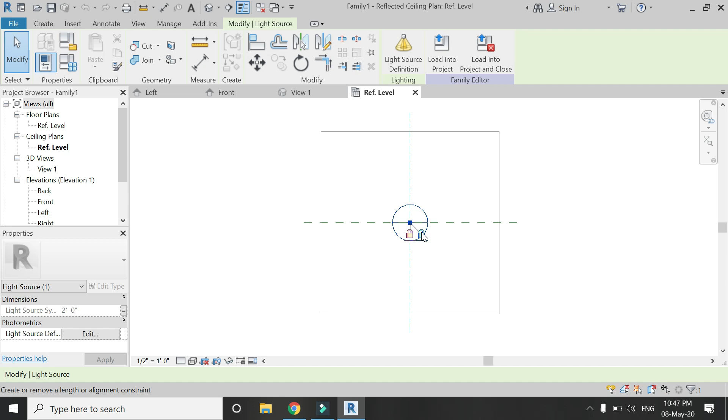Open a new family template file of this lighting fixture ceiling based. Now this family template file has this light source and a built-in ceiling. So whatever you design in this family file, it can only be placed on a ceiling.

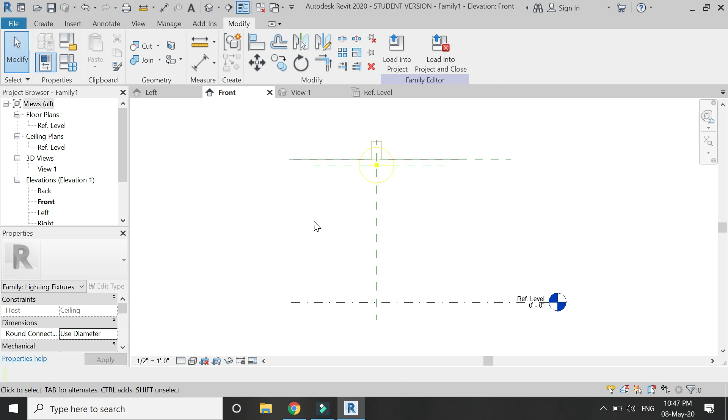So first of all, I've selected this void extrusion and I have created a circle of radius 3.5 inches because that would be the size of the light, and then I'm going to give it the extrusion end value 1.5 inches being the thickness of the light. Remember, use the void extrusion command for this.

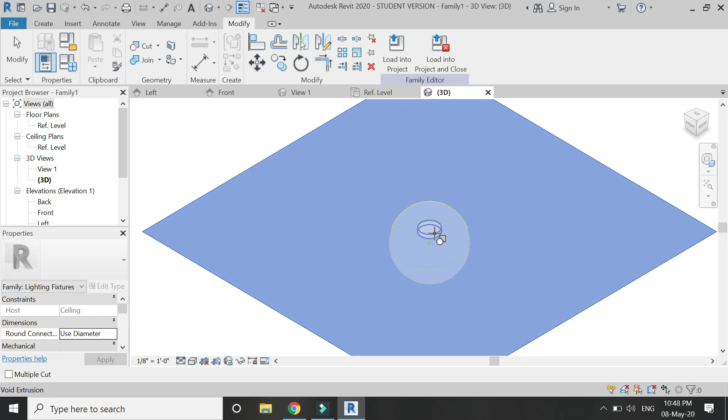Then go to the 3D and then select the cut command, then select this ceiling and then select this void extrusion. The purpose of this step is to create a void within a ceiling when you load this family file into the project. So this void extrusion will help in creating a void within that ceiling and it will not be overlapped.

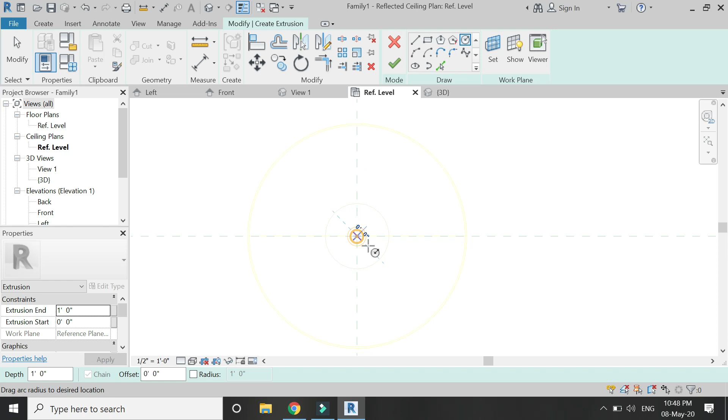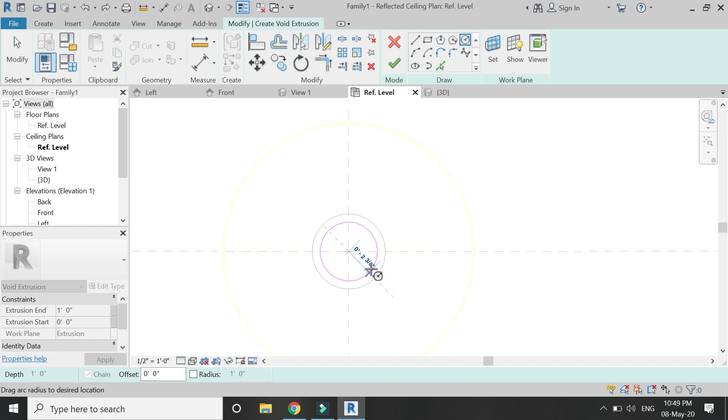Now select extrusion and again draw a circle of same radius, give the same extrusion end value. Again select a void extrusion, set the reference plane to this surface and draw a circle of 2.75 inches, this being basically the design of the light, and then give it this void extrusion, this thickness, and then select it, assign material to this light.

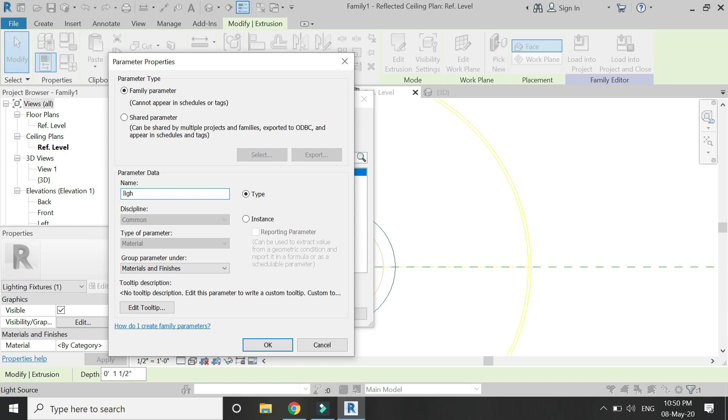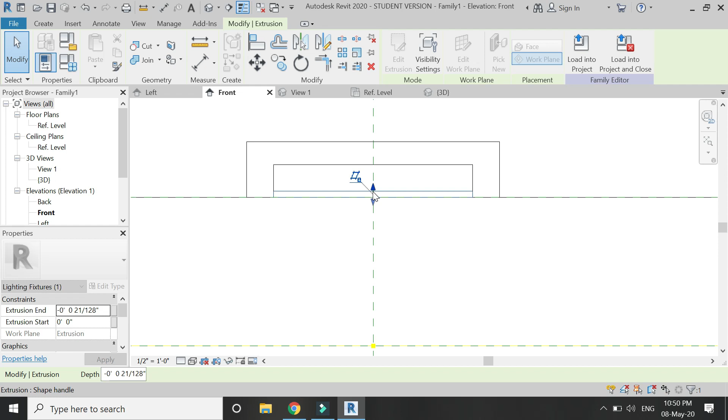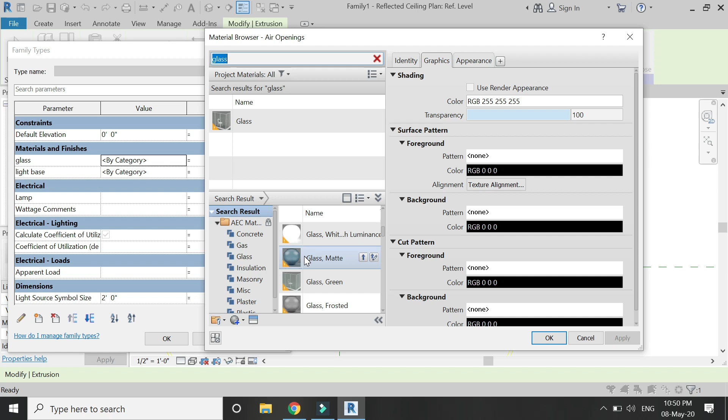Now draw another extrusion at this point. This is going to be the glass of the light. Then assign a separate material parameter to this glass. As for this glass material, I am going to give it the material of this glass white luminance. So it will basically glow when you render it.

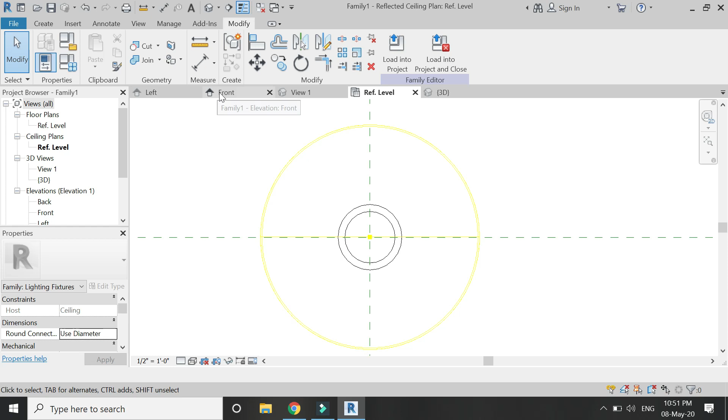And then assign the material to the remaining extrusion part of the light. As you can see, I have created this lighting fixture within the ceiling. So now move this reference plane of the light source so that it meets the ceiling. Now change this light source to this half sphere because it is going to be towards the downward direction only.

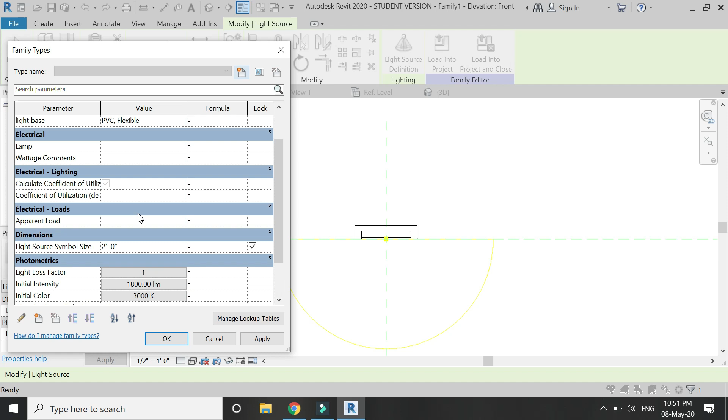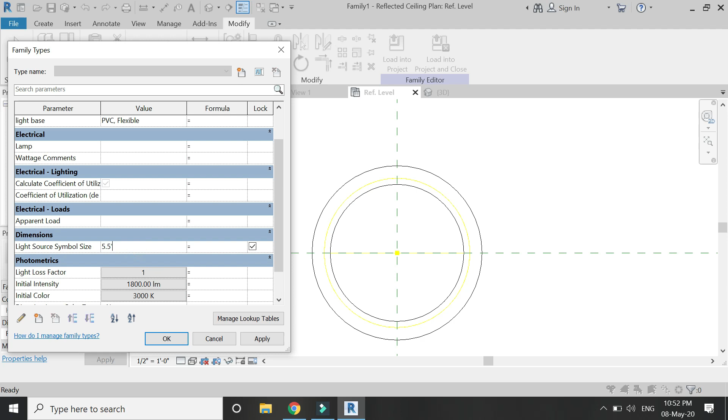Now from this dialog box, first of all you need to change the size of the light source. I'm going to keep it the same as this inner diameter of the circle, being 5.5 inches. And from here you can change the watts and the lumens of the light, and from here you can change the color. Let's keep it cool white. So yeah, that's it.

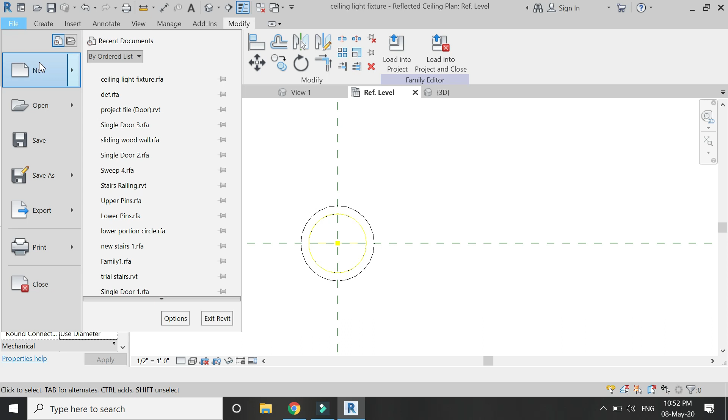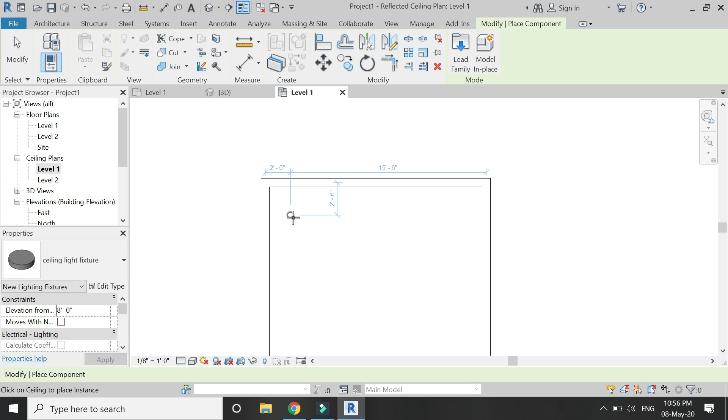Now open a new project file. I have skipped the part, but I have created the doors, walls, ceiling and floor, and then I have loaded the lighting fixture in the project file. And then in the ceiling plan, I am going to place these light fixtures, as you can see in the video. These lighting fixtures can only be placed on the ceiling, and for that you have to go to the ceiling plan. It can't be placed anywhere else. Well, maybe in 3D, but obviously it's difficult to place an object in 3D.

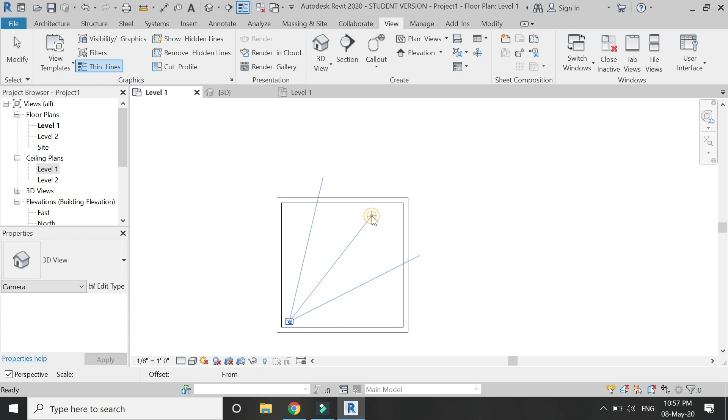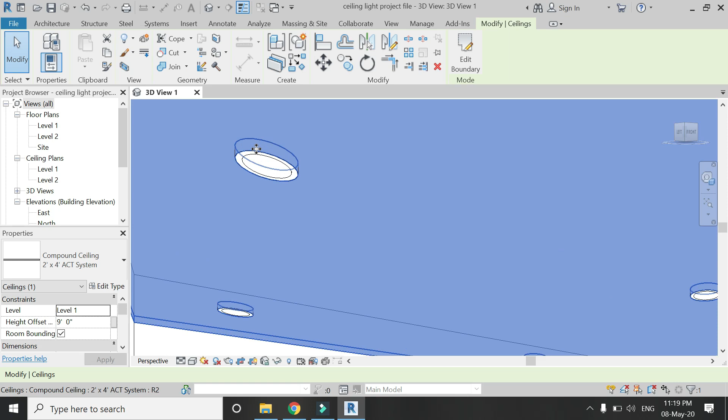Now place a camera in the floor plan to see how this light looks in 3D. So it kind of looks like this in this view. And when you select this ceiling, you can see that the void extrusion has created openings within the ceiling, and you can see the lighting fixtures are not overlapped with the ceiling. So that void extrusion part is very important.

Now let's create a render set. From here, select this interior artificial only.

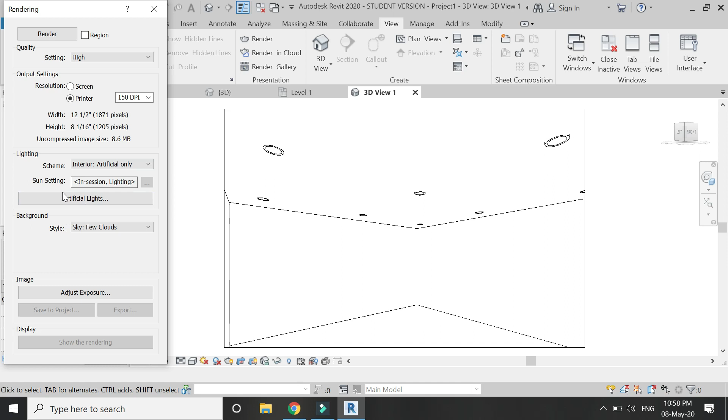Also check that. And now let's create a render. So this is how it looks. Ignore the color of the materials I have placed. Okay, so now you can see how these lighting fixtures look in the 3D views, and the detail which is created within it. So that's all for today.